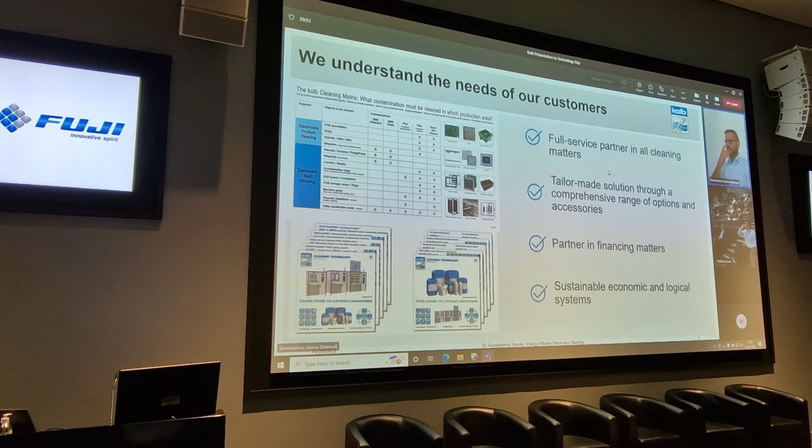So now let's go into a bit more detail. The cleaning result, better to say, is determined by 5 constitutive parameters. We have the machine, obviously. We need a certain detergent, which gives a bit of chemical power to the system. You can add thermal energy or time, and you can have intelligent software.

We found out that the power of all criteria combined is much greater than the sum of its single dimensions. That's why from the very beginning we had not only the machinery and the appropriate chemistry, but always our own software department developing to utilize the machinery and the chemistry to the utmost.

By doing that, we had the possibility to reduce temperature and time dramatically, and both consequently end up in lower consumption of energy and lower consumption of detergent. So that was always what we tried to do and what we will continue to do.

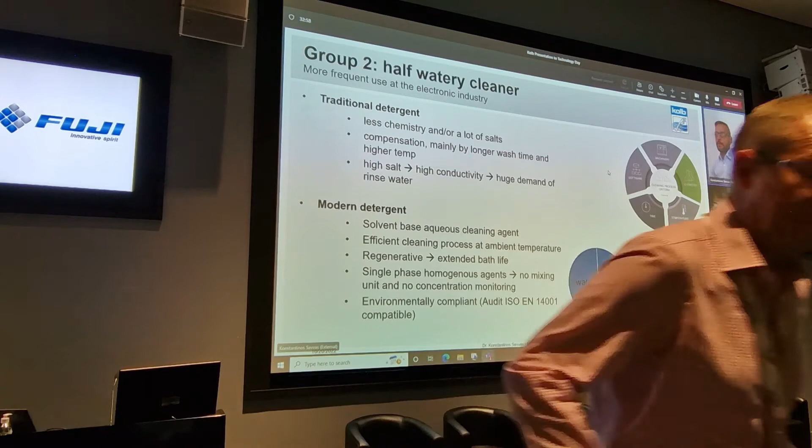Another thing is that these types of detergents are so-called buffered. So what does it mean? You're putting a lot of acid from your flux or whatever into the medium, and typically it gets saturated very fast. By buffering these agents, you are able to extend that and not have this dramatic drop to an acidic value.

The next thing is, by using these nanoparticles, we can have single-phase homogeneous agents. This means that you will not have any separation, which is what typically happens if you are not using the detergent, with the old-fashioned ones. And with that, you can understand that if you want to have a well-mixed medium, you need to have an external mixing unit. This mixing unit again needs an external drive and thus will consume more energy.

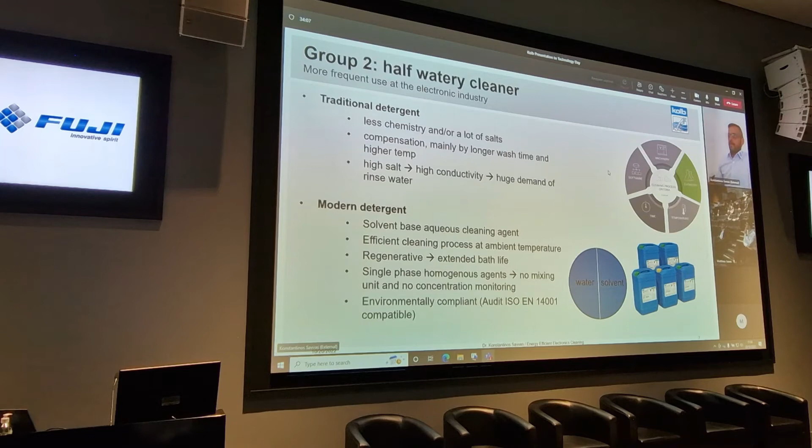And now I want to focus on the temperature. Everybody knows when we were in the past trying to clean our clothes at home, we typically used like 90 degrees or maybe 60 or whatsoever. And with the rise of new and modern formulations in the chemistry, we have been able to reduce our temperature at home to, I don't know, 30 to 40 degrees. And that's the same approach we will always strive to have with our machines. And the additional explanation why we are doing this, you will see here on the left-hand side.

What we see here is on the y-axis we have the vapor pressure, and on the x-axis we see the temperature. And what can be clearly seen is that it's not only that the vapor pressure rises with elevated temperatures as expected, but it rises exponentially. To give you a short idea of the vapor pressure, the higher the vapor pressure is, the higher the gas ratio of the water is. Let's put it differently, the blue line, sorry, I need to use my mouse here. The blue line determines the thermodynamic balance between the gas phase and the liquid phase. So everything above that means you have gas, and below that it's liquid.

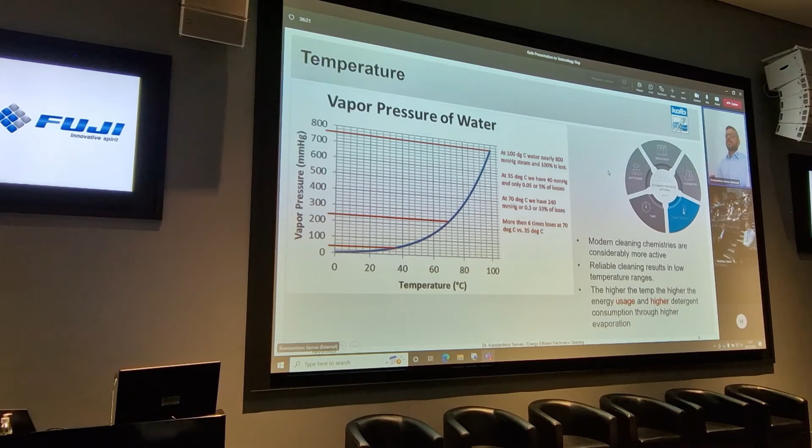Another thing we did from the very beginning is we were always searching for the most efficient components in order to have a machine working very efficiently later on. So we decided very early to move from mechanically sealed pumps to the so-called magnetic coupled pumps, where you do not have any interaction between the drive and the pump. This results in low maintenance, no sealings, and lower energy needed to provide similar pressures.

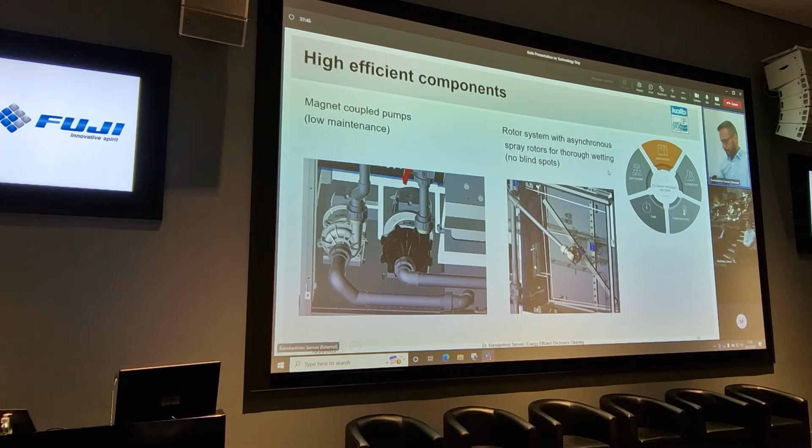On the right-hand side, you see our rotor. We have 2 asynchronous working rotors in operation, and we're doing that to have a clear and thorough wetting all over the product, and thus you have a continuous flow over the product, and you can consequently reduce the time. Another thing is we have nozzles here where we use the kinetic power of the detergent streaming in through this tube, and then it's just rotating by the force of the detergent flow. So we don't need any external driving units to move our rotors.

The next thing I would like to show you is our patented drying modules. We have the so-called VMH, and we have the CWA. The Venturi mixed hot air, that's what it stands for, is quite simple. You have a heater providing an air stream with a temperature of about 600 degrees. And by means of the Venturi tube, you just suck in cold air from the atmosphere, and you quickly have the temperature profile you need in the chamber. So it's very fast. That's the one thing.

And depending on the product you want to dry, you need not only the convective energy to dry, but you also need the kinetic force of the air. And to realize that in our systems, we're using a side channel blower. What you will see inside is a turbine. This turbine starts rotating, and in addition, just by compression of the air, you also heat the air up, so you have a good combination of a thermal and a kinetic drying process. We can also provide machines with both systems concurrently, and by doing that, we can almost produce our own weather in the chamber, so we are able to provide almost every temperature profile needed.

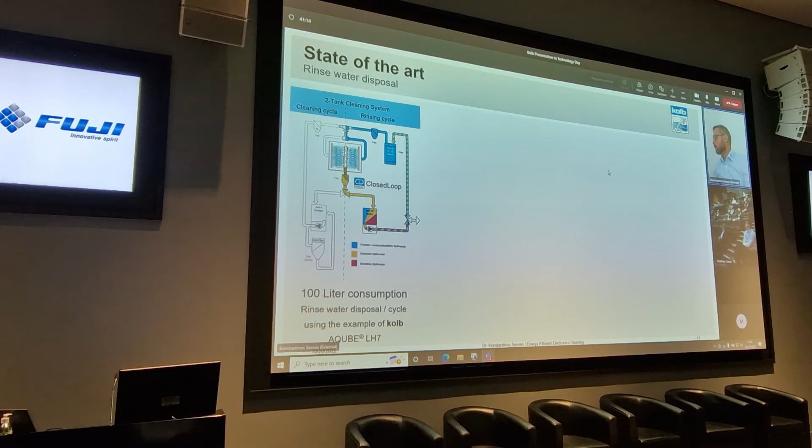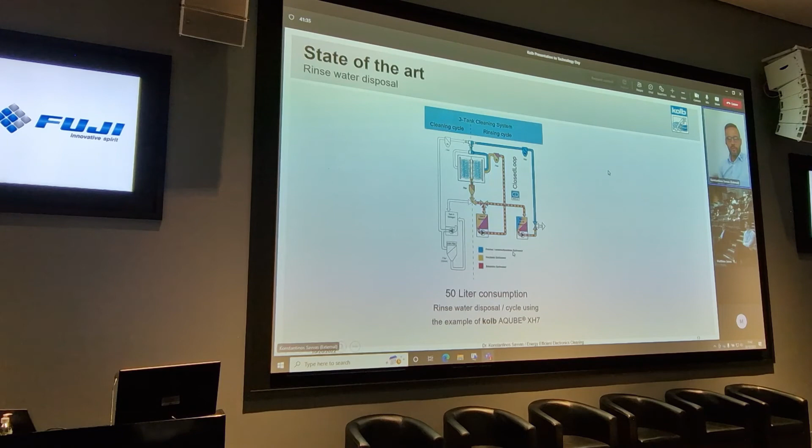What we see here on the left-hand side is the circuit diagram of a representative machine of ours, and such a machine would have about 100-liter water consumption per cycle. If you would go then to the three-tank system, so you would divide the rinse tank into two tanks, one for the pre-rinse and one for the clear rinse, you would be able to reduce your consumption remarkably, to half. And if you continue that, we have an external processing unit where we reprocess the water, going through heavy metal absorbers and through the DI cartridges. And by doing that, you can reduce it to 5 liters per cycle.

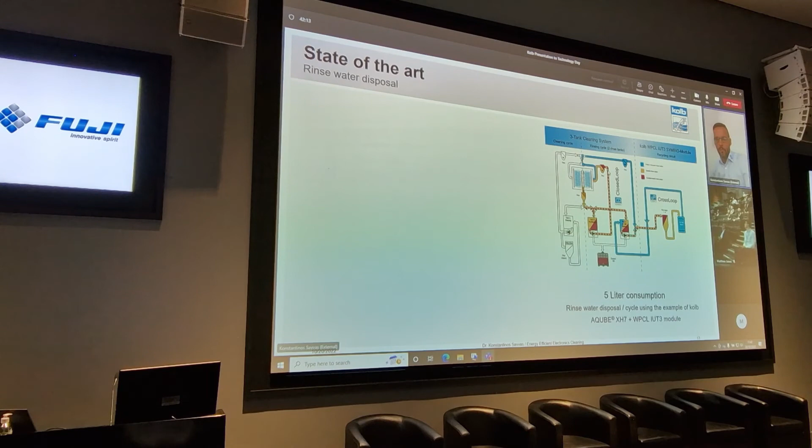So thinking of an XH7 machine, it has a capacity of about 500 to 550 Eurocard PCBs. So I would say it's a pretty good value. This was not enough for us, so we approached our R&D department and said, hey guys, what if we could reduce it to almost zero? So they came up with the project Zero Discharge, and they provided us with the prototype. We did some testing, and we have been able to reduce the water consumption to lower than 2 liters. So how did we do that? I will try to explain here.

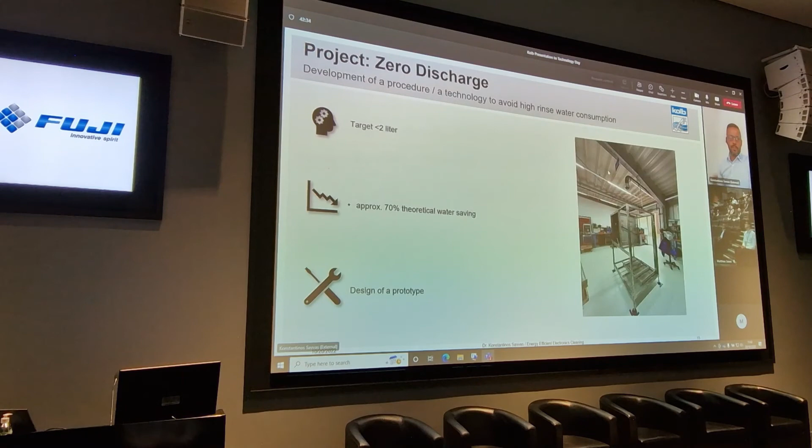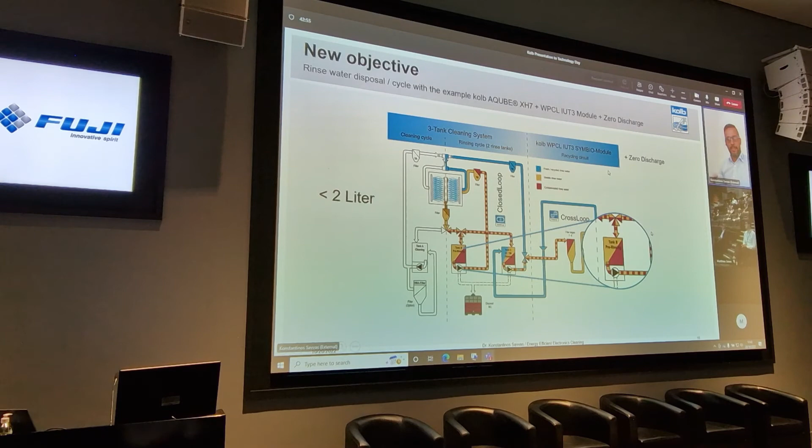Similar to the approach we had before, we divided one tank into two tanks, and so we thought, what will happen if we just follow this logic further and try to divide tank B, highlighted here, into more parts? As a short step back to increase understanding: typically, here you clean your boards. The detergent flows back into the tank. The tank is contaminated with the parts coming from the boards. Then you have a certain carryover. The rinse water is contaminated, and then again the carryover for the clear rinse.

And what we did here is we divided tank B, which you can typically use 200 times before you need to do a full water change, into 3 parts, and this is the interesting part: we added a counter current stream of fresh water here. This fresh water current takes over a bit of the contamination from tank C, a bit from tank B, and a bit from tanks 3, 2, and 1, and brings it out to the dispose area. And by doing that, it's not necessary anymore to do any water change, because you keep the balance in the tanks equal, and it will just follow up to a certain saturation, and that's it.

And this was the great success we had so far, and we would like to promote that final prototype. There are a few adjustments we need to do. There are a few questions: what happens if water stays too long in the tank? I mean, everybody knows from the aquarium what happens. So there are a few things we still need to investigate before we can promote it to the market.

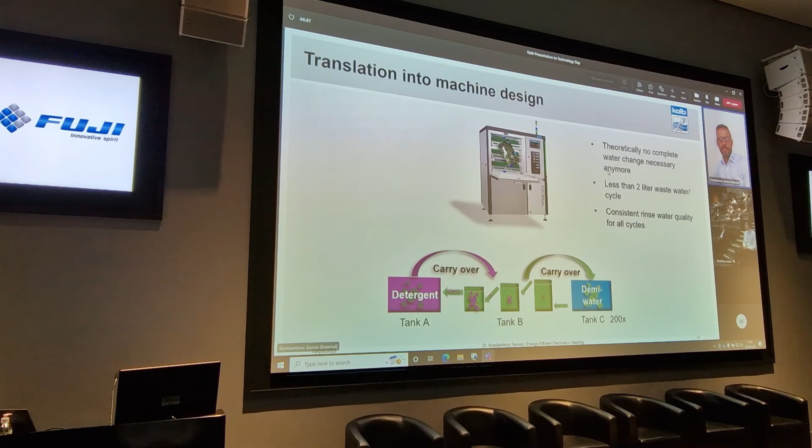Now I'm at the end of my presentation. I would like to give you a further outlook of what we are working on. We are working on a so-called cleaning grid, and there are a few ideas behind it. One is the possibility to implement it inline into the production lines. The other idea is you can use this, as you see here, with the 5 slide-in units as a buffer to clean at times when the operator is not on site. Or you increase the capacity remarkably just by separating the loading and unloading process from the process itself. And here again, I've brought a short video to give you an idea how this will work.

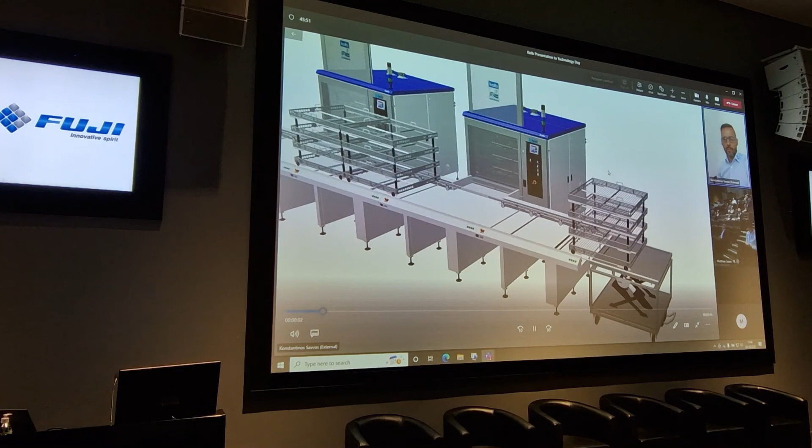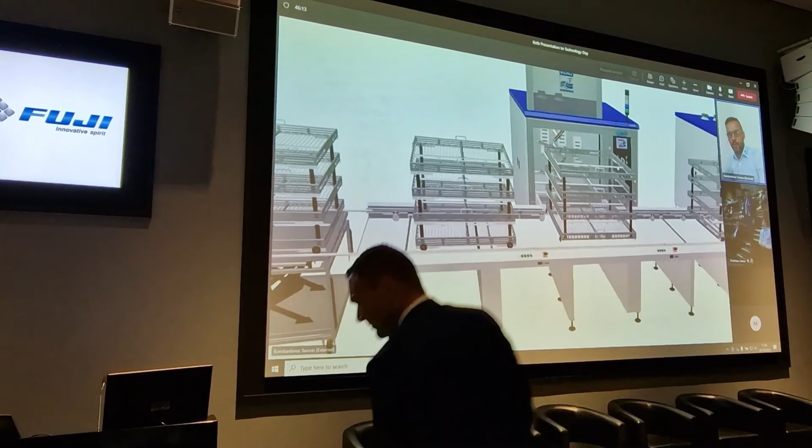So here's the end of the line. This is the unload on this side. The freshly cleaned parts come out, going through the conveyor feeder to the unload area. The contaminated products go in, the machine closes, starts the process, and so on. And the second machine is doing the same thing. Every second slide-in unit goes into the one machine and every other into the other, subsequently following.

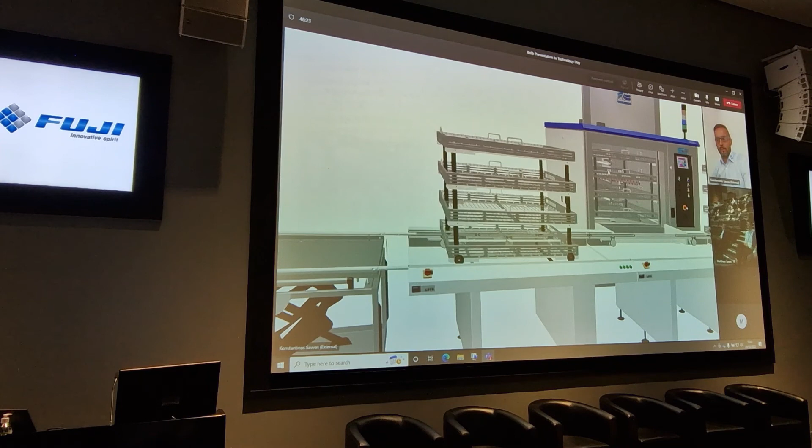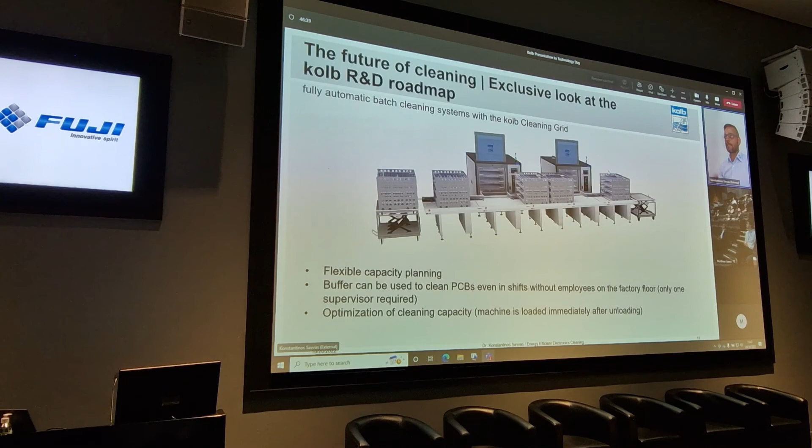That was how we interpret machine efficiency and having an efficient process in the cleaning industry. And now I'm here to answer your questions.